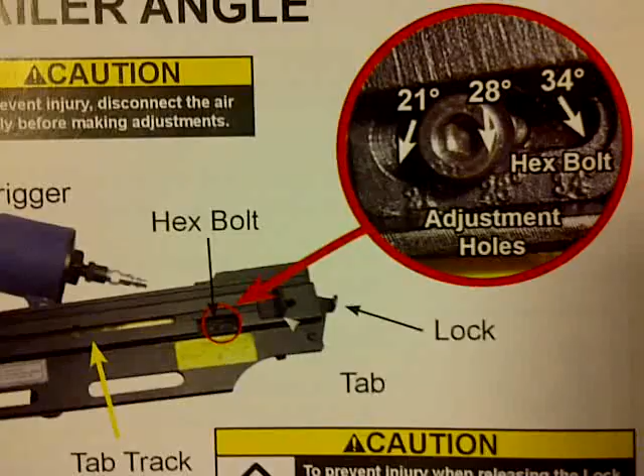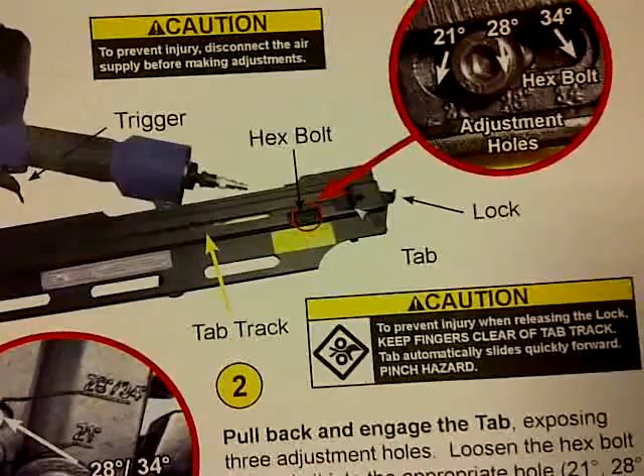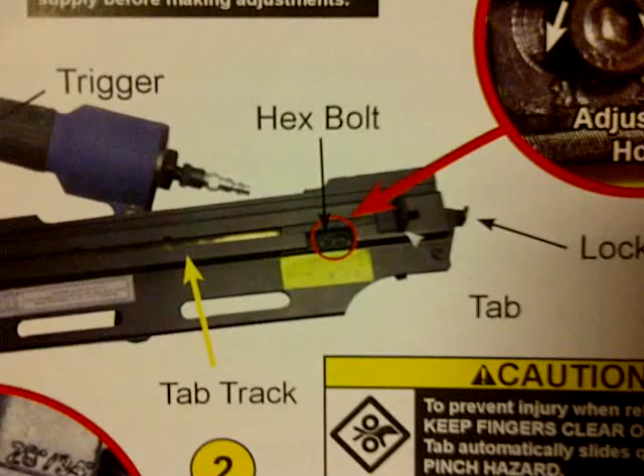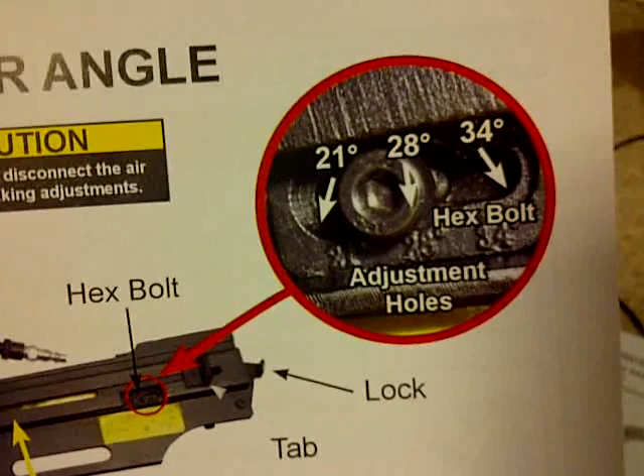Apparently within the magazine clip holder, when you pull that lever, there's a little opening where that red circle is, and you're going to see something like this—there's a hex bolt, and it's in the position of 21 degrees. Then there's three holes: 21, 28, and 34. So there are three holes for it, and you need to unscrew and rescrew them to the appropriate degree you're in, on top of setting the pin, which is here.

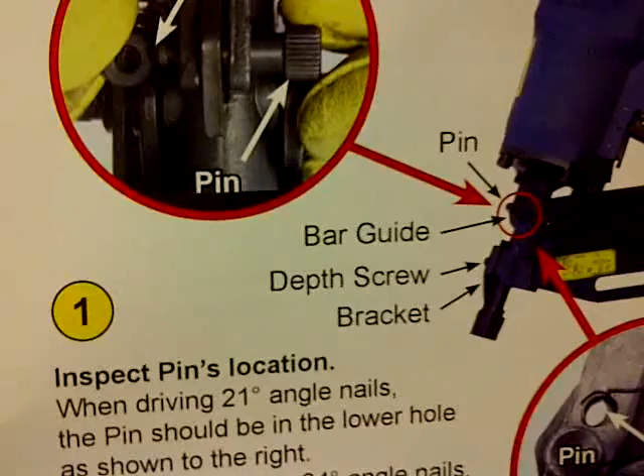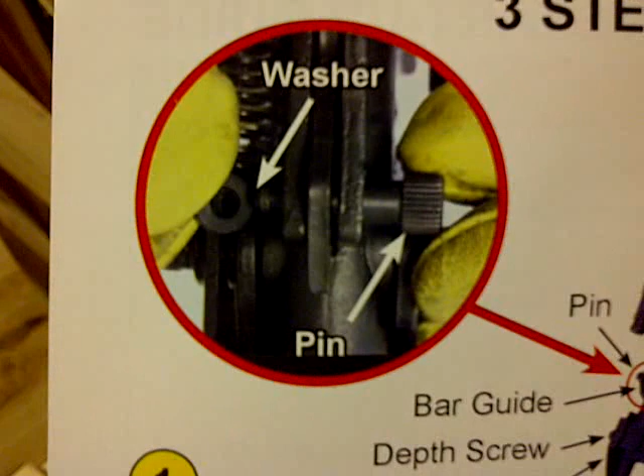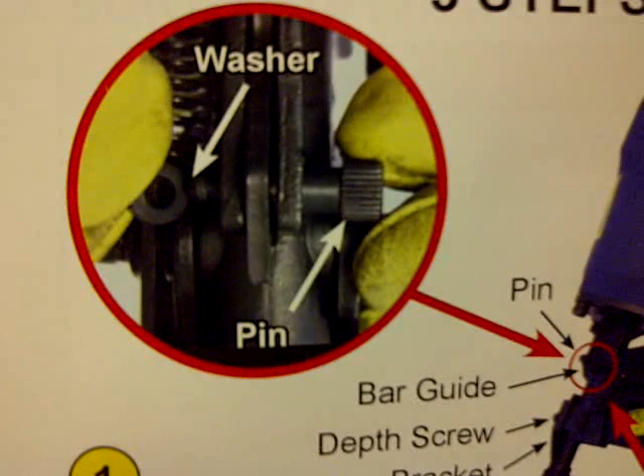You also have to set the pin, and we saw that, but wondering how you put it in. Apparently there's a washer, and that washer is not metal—it looks like rubber, so you can take it off and remove the pin that way. You don't unscrew it or anything; it's just free floating, held up by some kind of rubber washer that slips in and out of that little grooved rod. So you have to do that, and then also adjust the angle on the magazine clip, or the magazine, I should say.

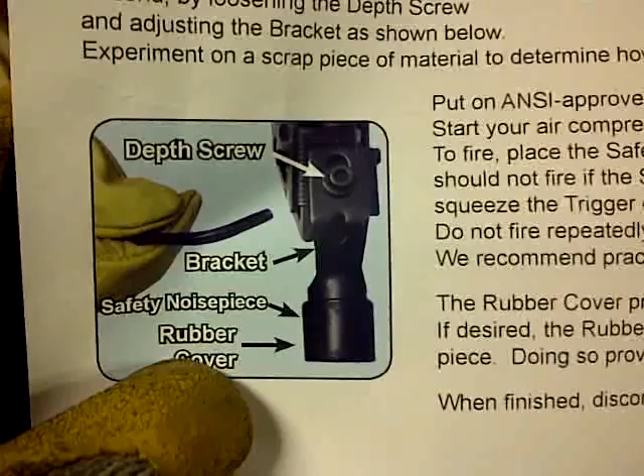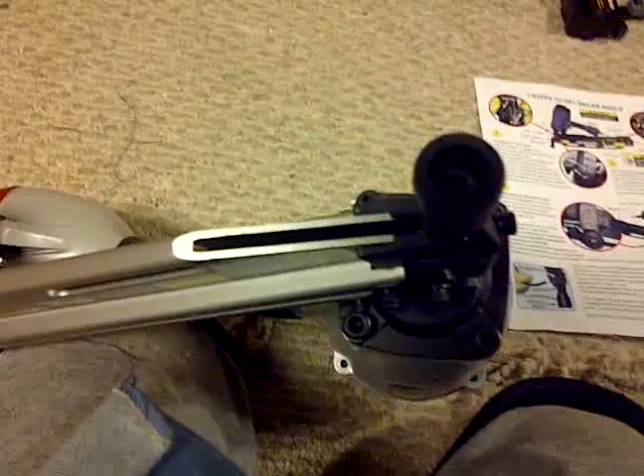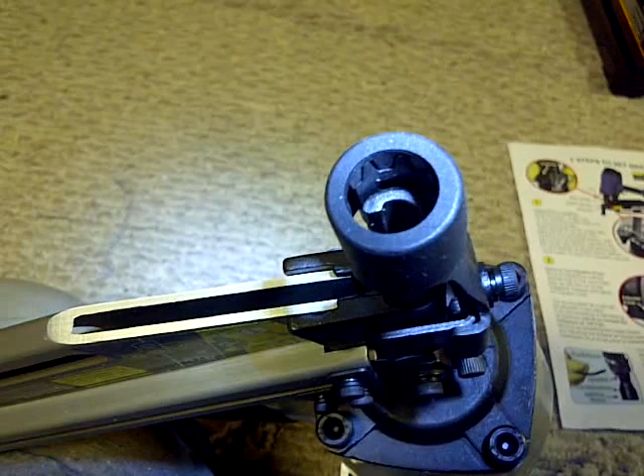Another thing here is the depth screw that can be adjusted, and also the rubber cover. You can take that off, and it's a little spiked nose tip on it. Let me see if I can show you. I'm blocking the light, but that's alright. There we go, you can kind of see it. So you see the teeth right there—you could take off the rubber cover on the tip, and they have a teeth cover that you see there, so you can get a better grip.

So that's one thing we did not know until we read the manual. The manual comes in very, very handy this time. Very proud of it, because usually, a lot of times, it's kind of useless.

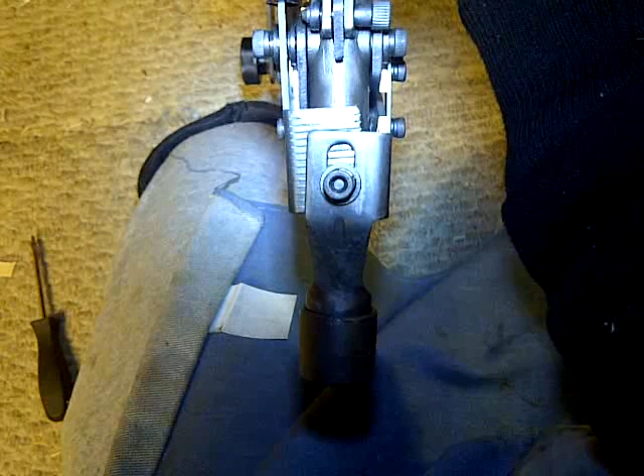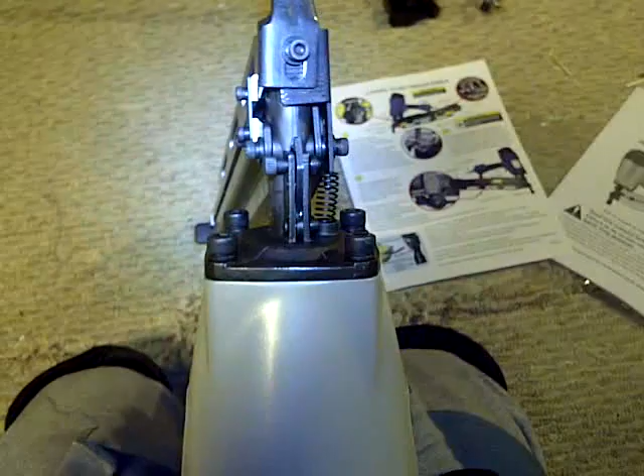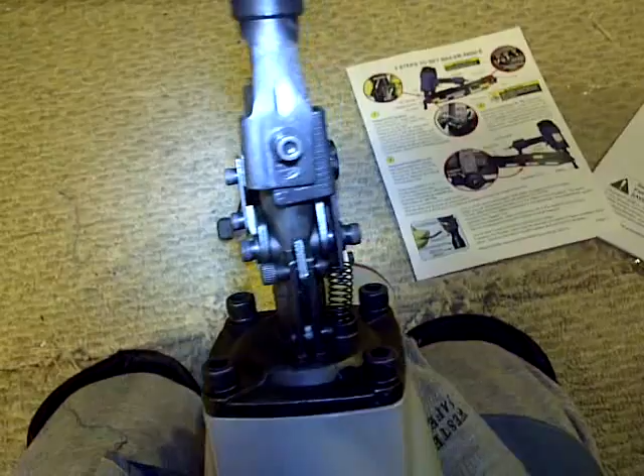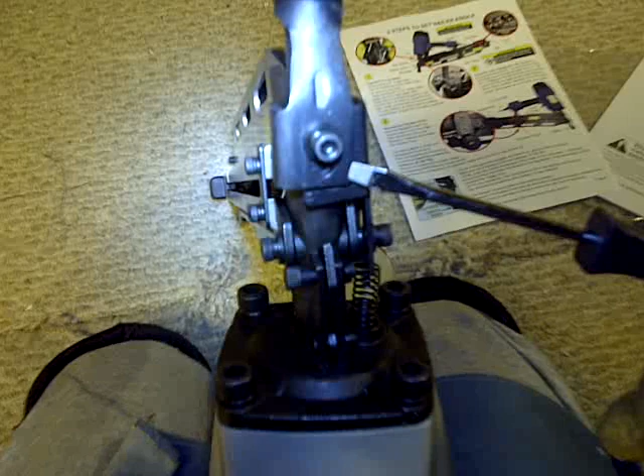And then here, that piece right there, you can see little slots. I don't know how accurate that is—the magazine clip is offset. See how I'm pointing it straight, and the magazine clip is coming off to the left. It's kind of weird because you've got this thing right here coming at a different angle, and then the back end coming at a different angle, so it doesn't really quite line up. I'm not sure how that's going to work as far as measuring things. It's kind of nice to have at least some kind of line or groove—maybe it just slips into one of the grooves or not, I'm not sure.

But you're going to need a hex wrench to work with all this, and once you know it—today I actually got some hex wrenches, bought some at a good price, of course you know where, both standard and metric.

So that has a little washer, looks like a little washer, so hopefully I don't have to adjust it. It's set, comes out of the box set at 21 degrees. And that's something that seems a little bent, but maybe not.

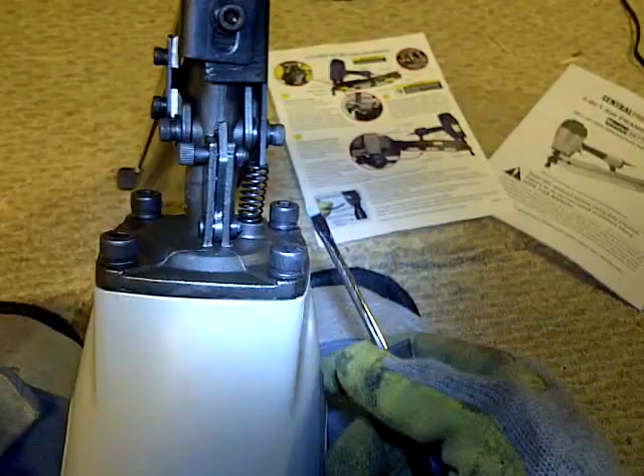Okay, just making sure on the spring I'm not jerking off or anything. I'm just checking. Man, seems like I look like I am, but I'm not.

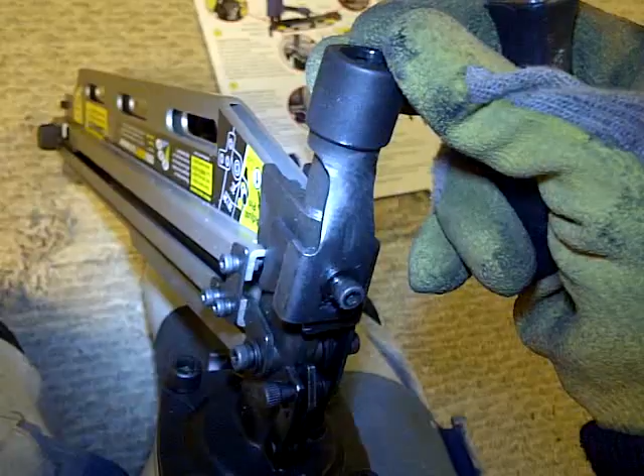So anyways, the part that we missed earlier if you didn't read the thing—there's some directions right here, of course. It tells you right here as well. So hopefully you're not going to miss it.

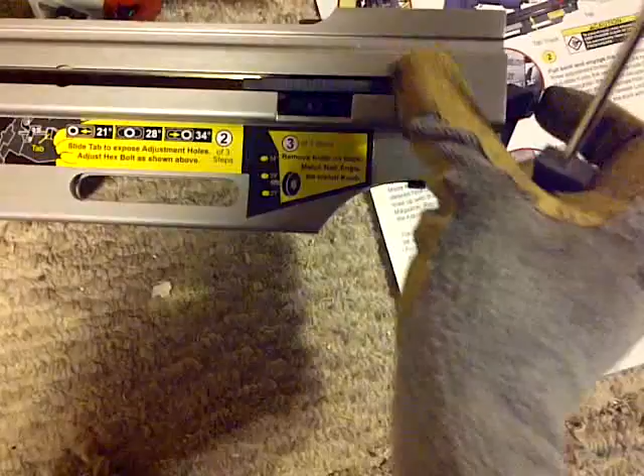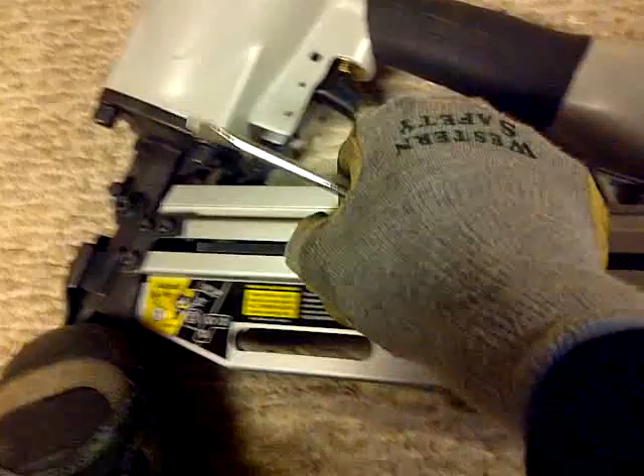You could easily miss it, because here's the clip—I pulled it back. To release it, there's a button right here, so you pull it, release, and look at that, it goes all the way up. It has a little rubber handle to it, which is nice. But basically, it's going to be in this slot that you're going to see it, so when it's all the way up here, you're not going to be able to see it. You have to pull this back out here, and then pull it all the way until it catches onto the clip. There you go, it's caught onto the clip, and there it is right there.

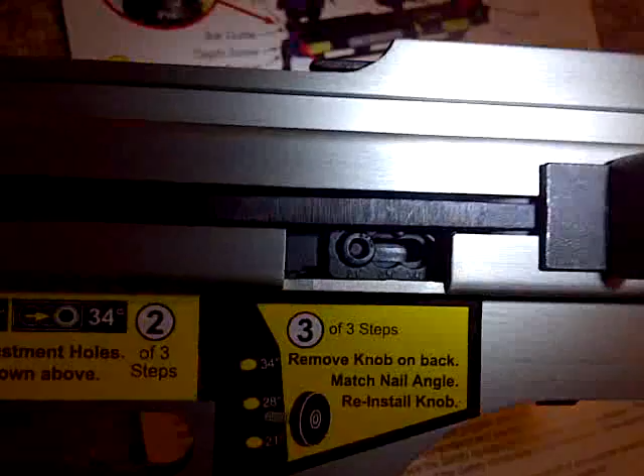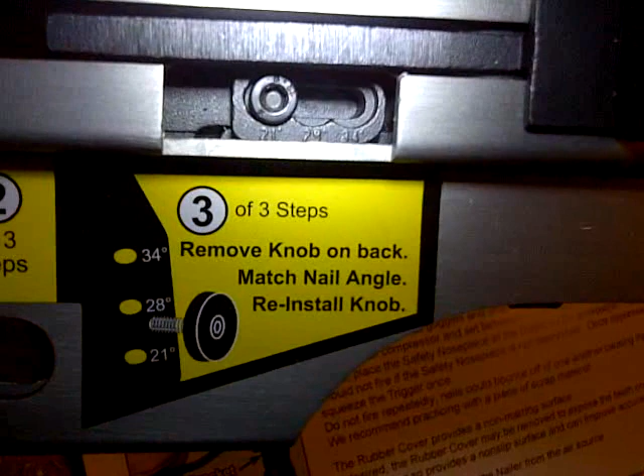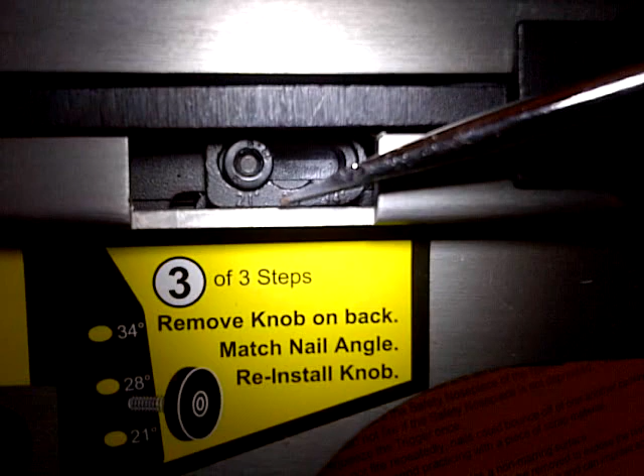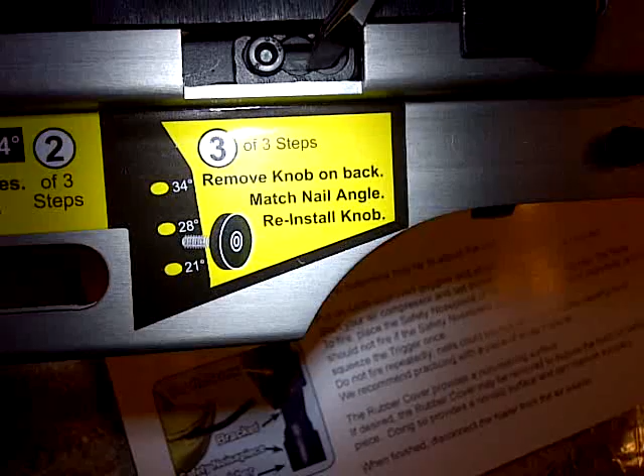If we zoom in here, hopefully you can see it—maybe not, you can see some numbers. There you go, you're seeing some numbers. It's already set at 21, then you've got 28, right here in this hole. And there's three holes for you to put it in—well, I shouldn't call them three holes, they're all just empty space, one round space here. Let me see if I can get another.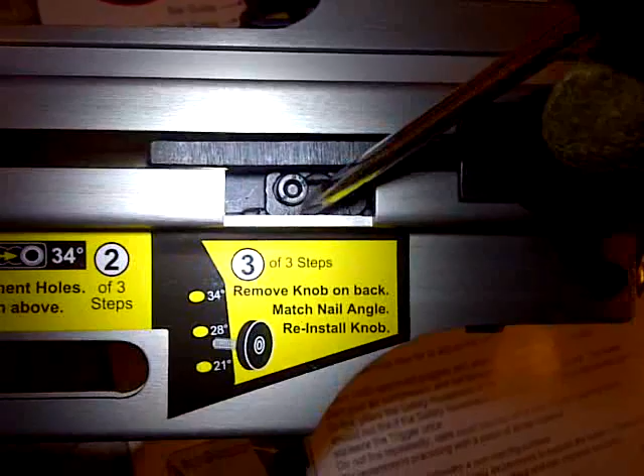It's just one space here, and then one space here, and there's just a slot for it that's round that you just tighten and you can move in. So there you go. That's kind of what you all missed out from last time, from just viewing it.

But because of the manual here and his quick reference guide, we're able to catch up on a lot of things really quickly. On the back side, it tells you how to do a safety test on it, which we're going to do. I did check the CFM on this: at 90 PSI it's 0.6, at 40 it's 1 CFM. So it's not really going to power this, because it says average CFM is 3 at 90 PSI.

But let's give it a try, shall we? Guess it couldn't hurt too much. Well, yeah, you know what? What do you know, it comes with Allen wrenches. I'll probably use my own set anyway. Looks like that's why you got 3 different Allen wrenches, for the 3 different setups. Makes sense, huh?

And then there's oil. I'm not going to use this oil because I've got my own oil I'm going to use first. So let's put you in the holster real quick. I'm running low on batteries, and I'm just going to give it a dry test run.

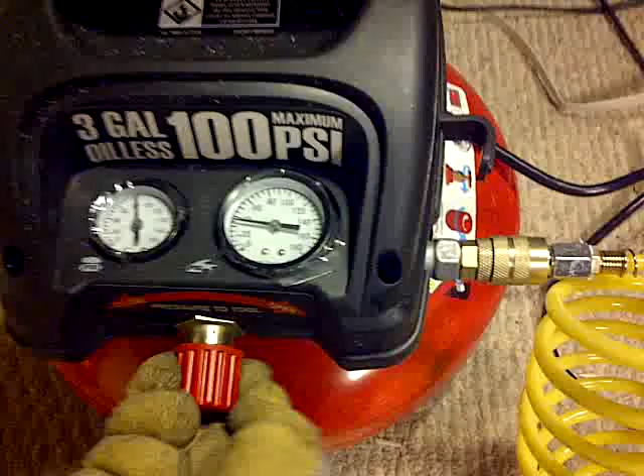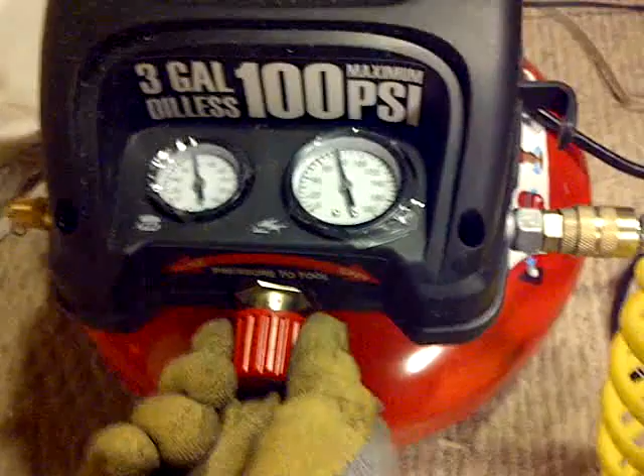It says 60 to 70, 60 to 100, never exceeding 120. But let's just do 80 then. Oh, gotta turn it on. Sorry, cover your ears.

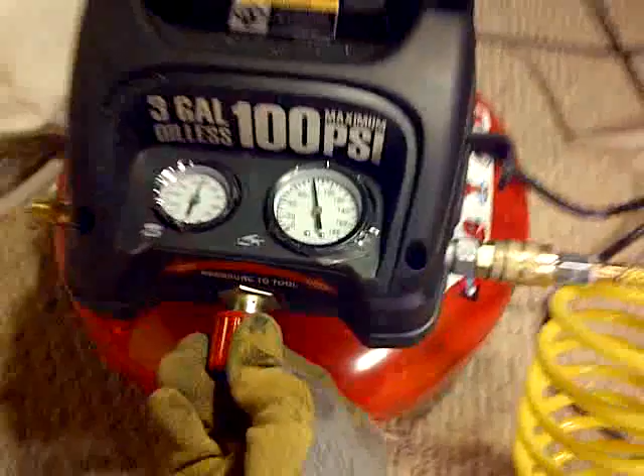Okay, so it's set at 100. There's 100 PSI, probably like more like 95 in the tank, and then I got it set at 80.

First of all, let me put my safety glasses on, because where the hell is my safety glasses? Tell me I lost my safety glasses already. Maybe I did. Should be another set around here somewhere. Okay. Strange. No, they're on my head. So, funny. Alright, so...

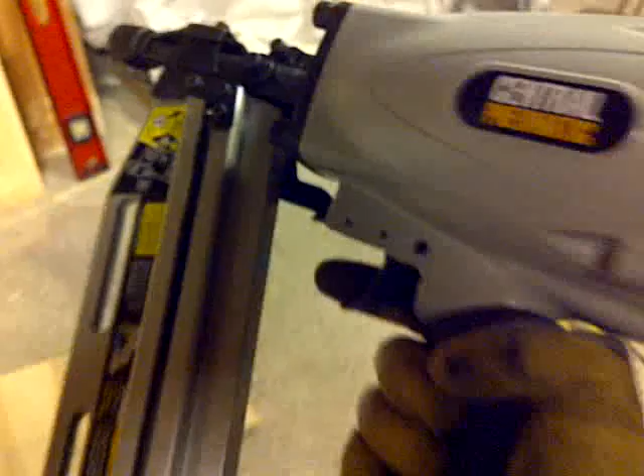Here's what I'm going to do. I'm going to go ahead and just run the test. First of all, it should not shoot anything. Okay, shouldn't shoot anything if there's nothing on it, if not depressed. Check, okay, let's check.

Excuse me, okay, so with nothing in it, not depressed, should not shoot anything. So you put it down, it should not shoot. Good. So the only time this should shoot is if you depress it and then you pull the trigger.

Ooh, okay, so you all heard that. And then if you pull the trigger again, you're not able to shoot again. It actually says do not pull trigger repeatedly, like up and down, initiating the rubber head and then pulling the trigger. But in reality we're really going to do that. So it should not pull. So once it's been engaged and you left it there, it won't shoot again. Then you have to release it, and it's not supposed to shoot, and then test it again. Okay.

So, okay, well, you know what, it might possibly work. Let's see the indentation on this. That's the indentation that it left behind. You see some shadows here. So that's kind of what it left behind, and of course that's going to drive the nail in through right there. So, well, let's try it again.

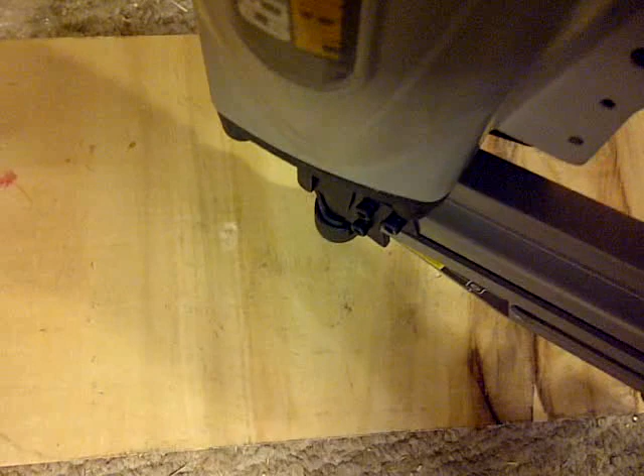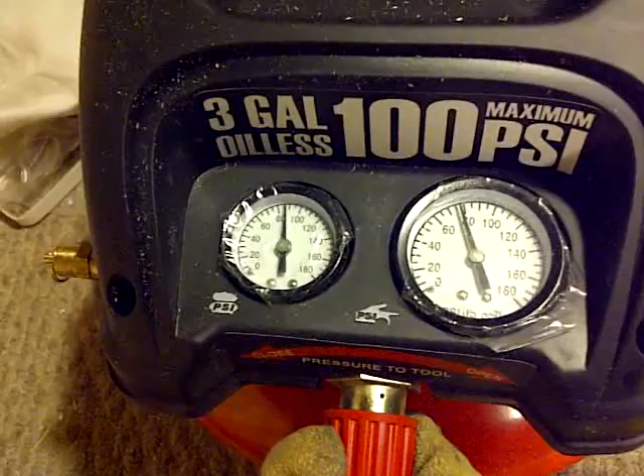Okay, sorry, the PSI is not set high enough on this, so gotta fix that. There, 80, I guess 80 to push it. At 40 it doesn't do anything.

So you know what, I probably didn't check the pressure on the regulator on this side here. Make sure it's 80. Now that I look at it, it's left quite an indentation here compared to my first one, which I probably didn't verify the PSI pressure. So looking at this, it could be possible that this little 3-gallon tank can drive nails with this. It could be possible. I'm gonna field test it, so there's an update for you.